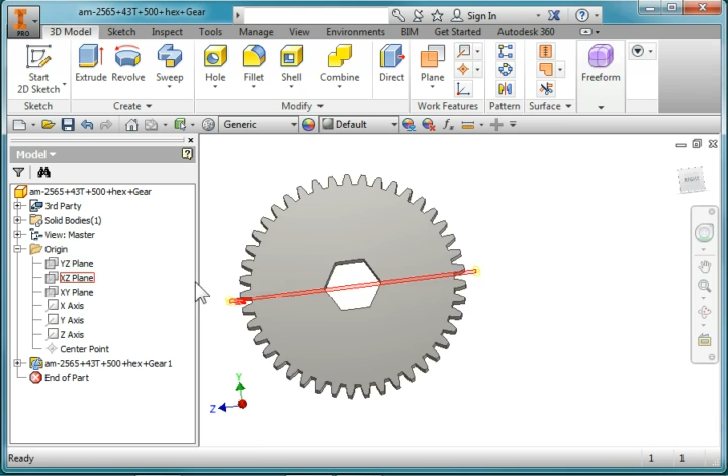So I'm going to add an axis to the part. Notice that here there's a folder of the axis that I'm going to create actually already exists, but you really can't turn them on and off. They're there as references, so I'm going to create a new x-axis that goes through the center of the part, and to do that I'm going to come up here to Axis and create a new axis through

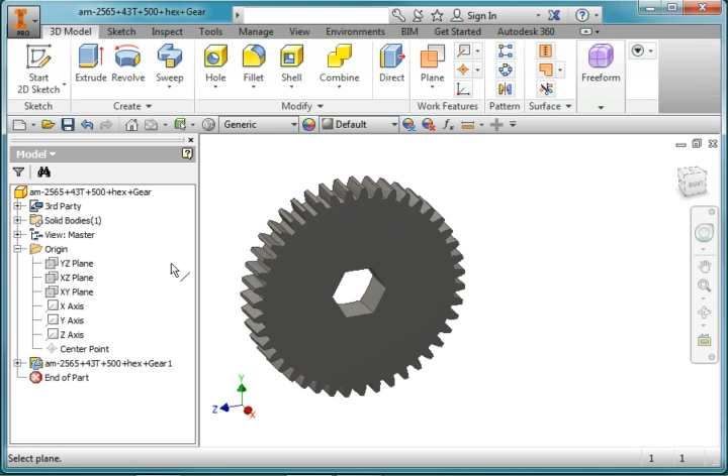intersection of two planes. So now it's asking me to select the planes, and I'm going to select this XZ plane and the XY plane. And now if you notice, there's my axis, and it's down here, work axis 1. I'm going to rename it, call it axis rotation.

I'm going to create a new plane for alignment. When I align this to a hex shaft, I'm going to need a work plane to align. So if there's a plane on the hex shaft and a plane on the gear, I could just align those two planes. It makes it a lot easier. So that plane actually already exists, but it's here. It's under the origin, and I want it out here outside of that folder.

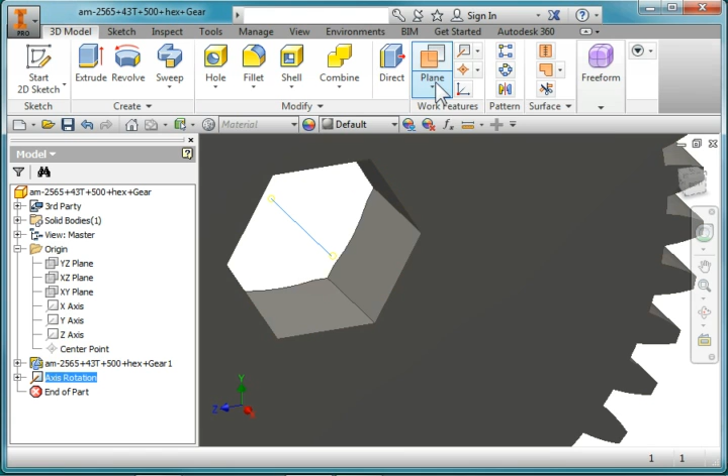So I'm going to create a new work plane, offset from plane, and you notice that this plane goes through the two vertices of the hex, and so that's exactly how I want to use it as an alignment plane. So I'm going to click on there, and I'm going to have an offset of 0, hit enter, and now here's my new work plane, and I'm going to click here just before the name of the plane, just before the W, and that'll let me rename it. I'm going to call it plane hex.

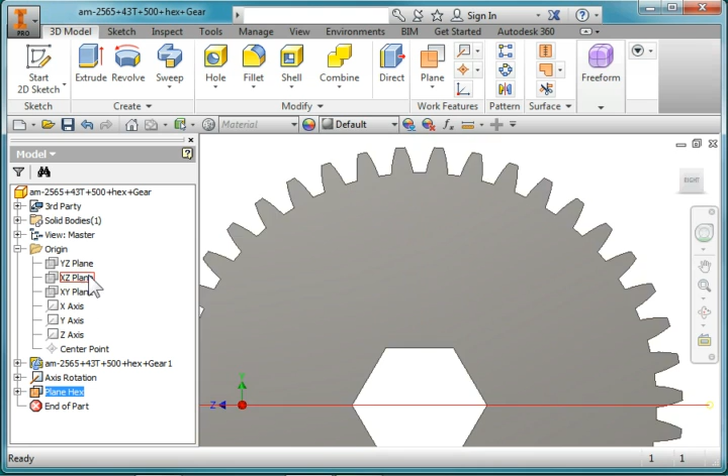I'm going to create two more work planes, one that goes through the center of the tooth and one that goes through the trough. And most likely one of those already exists because of how they designed it, and it in fact is this one right here, the XY plane goes right through the center of the trough of the key. And so I'm going to duplicate that.

So do the same thing, offset from plane, and I'm going to choose the... so let me try that again. I'm going to do offset from plane, and I'm going to choose this plane here, the XY plane, and set an offset of 0, and there's my new work plane. And I'm going to call it plane trough.

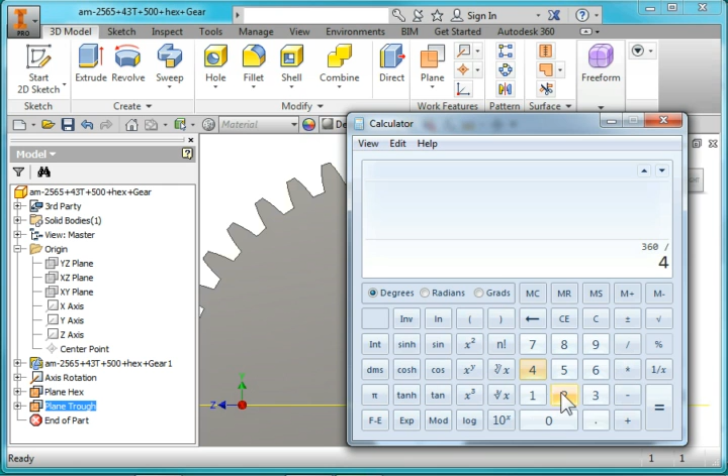So I'm going to create a new one that goes right through the center of the tooth, and to do that, I'm going to pull up my calculator. And this has 42 teeth, so I'm going to divide 360 by 42. But I'm not going over an entire pitch. I'm not going from here to here. I want to go over half a pitch, so I'm going to divide this by 2. And that's 4.2857.

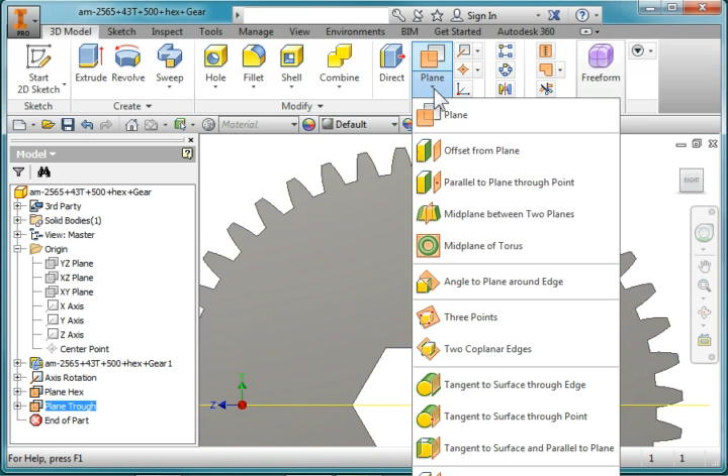So I'm going to create a new work plane at an angle around an edge. And that edge I'm going to use is this axis of rotation that I created earlier. So it's asking me for a plane. I'm going to choose this plane, and it's asking me for an edge. I'm going to choose this axis.

And now it's asking me for a measurement in radians. I'm going to type in the degrees. You have to specify degrees, so I'm going to type in 4.2857 and a space DEG for degrees. And you notice there's my new work plane right there. So I'm going to rename that. I'm going to call it plane tooth.

But one thing that Inventor did is that it buried my other work plane here underneath because it thought I was using it just as a reference. But in fact, I'm going to bring it back up here so that they're both at the root level. So I have my axis of rotation, my hex plane for aligning the hex shaft, my plane that goes to the trough, and my plane that goes to my tooth.

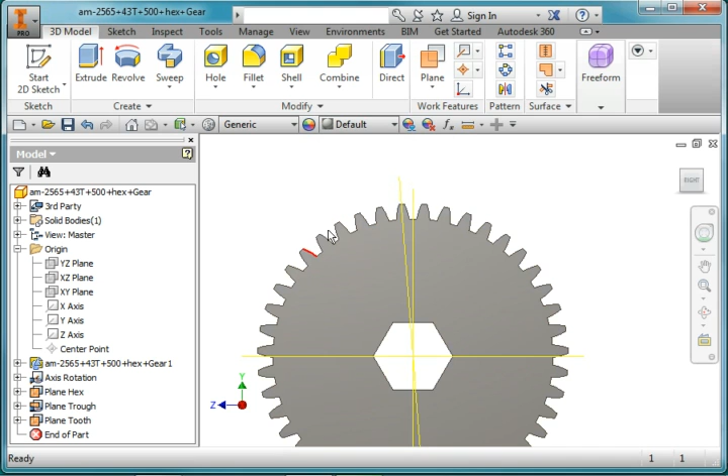Now I'm going to create a cylinder for aligning gear to gear. So I'm going to create a new sketch on that face, and I want to grab the center of that gear. I want to make sure I grab the center, and I'm going to go back to AndyMark, and you notice that under the description it tells you what the pitch diameter is. It's 2.15 inches.

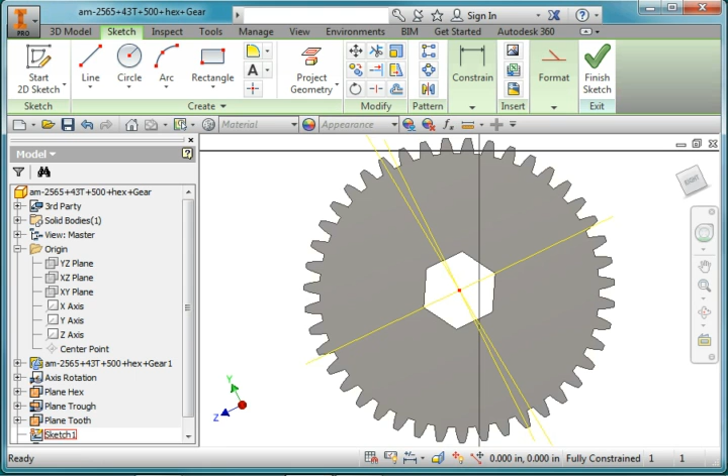So I'm going to create a circle at the origin, making sure that I grab that origin. It's very critical. And 2.15. And there's my circle. I'm going to hit the green check.

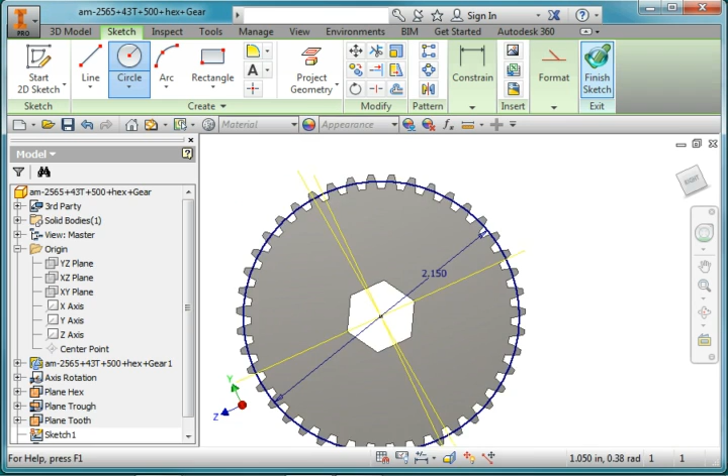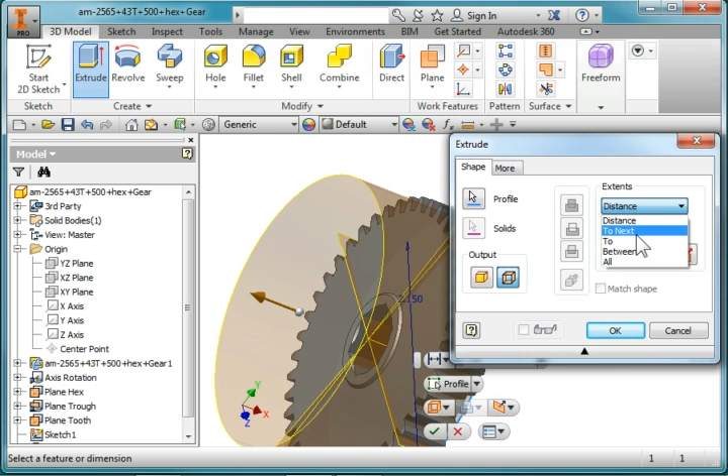I'm going to extrude, but I'm not going to extrude a solid into the body. I'm going to reverse the direction, but I want to create a surface feature, not a part. I don't want to superimpose a feature over a part. I'm going to go to this surface here, and there's my cylinder. I'm going to hit OK. And if you notice, it's created my surface feature. It's right here. And I'm going to call it pitch diameter.

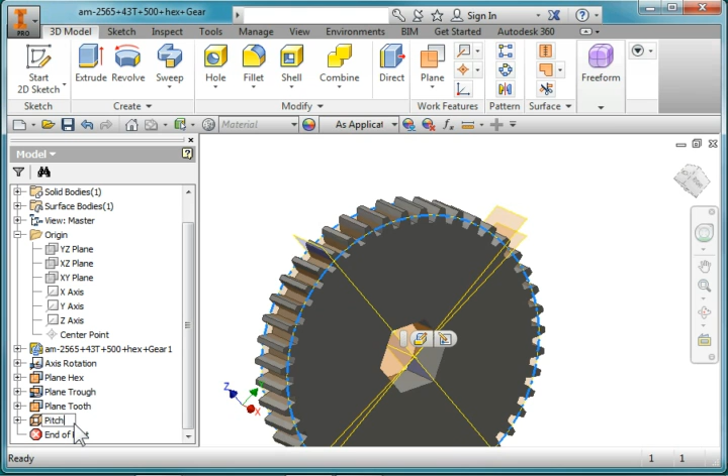And so there's my part, my fully documented part. I'm going to go ahead and save it. I'm going to save as, because I want to make sure where I'm saving it. And you notice what it wants to do. It wants to store it in the downloads directory, in the imported components folder, and I want to store it in Fembots 2016. So I'm going to store it here. I'm going to hit save.

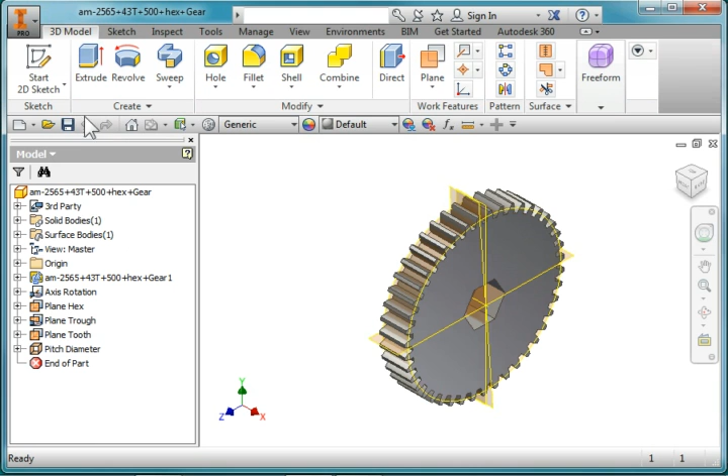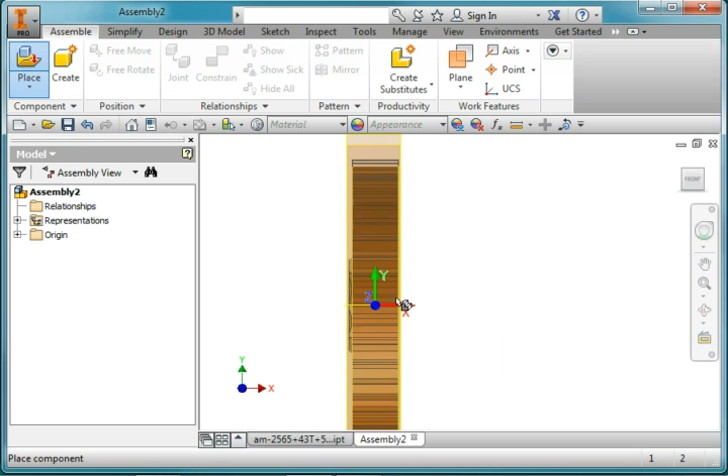I'm going to create a new assembly, and I'm going to place that part. Place the component. This gear. Well, here again it's Fembots 2016. That gear there. I'm going to place it. I'm going to place two of them and hit OK. So I'm going to go back to the first one, and I'm going to ground that part so that it can't move.

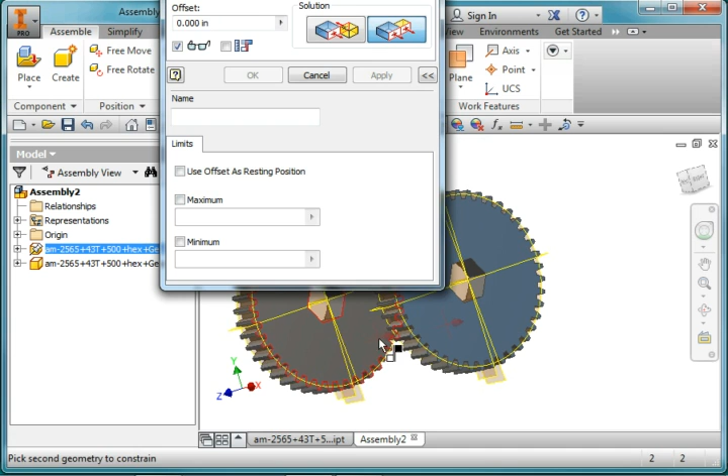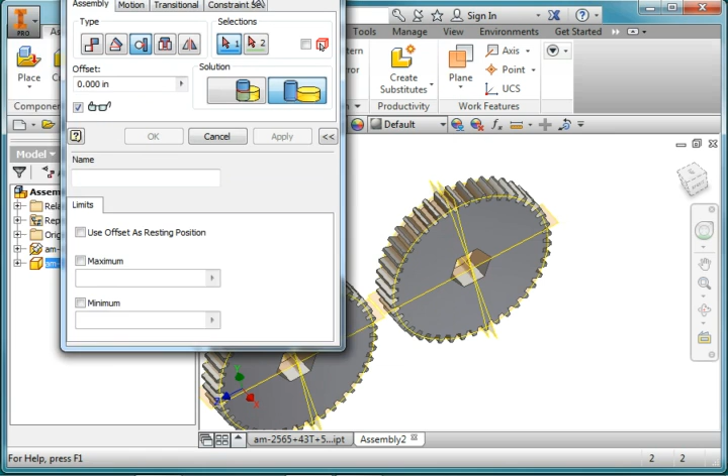And now I'm going to add a constraint. I'm going to use a flush constraint, and I'm going to make that surface flush with that. Hit apply. Now I'm going to add another constraint. I'm going to use the tangent constraint this time. And I'm going to align those two features that I created. I'm going to make that tangent to that. Hit apply.

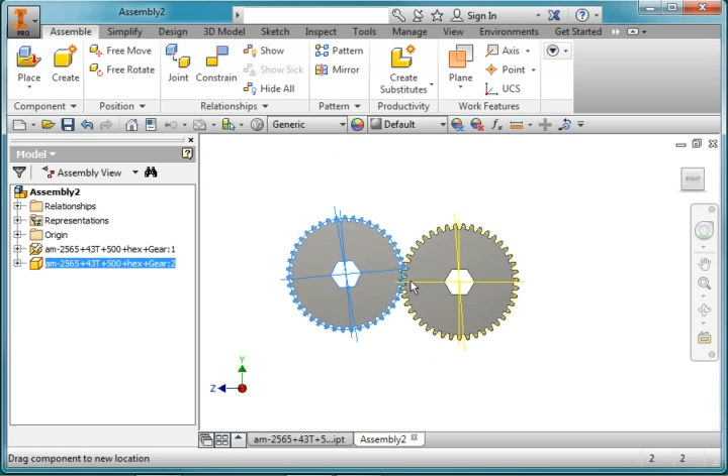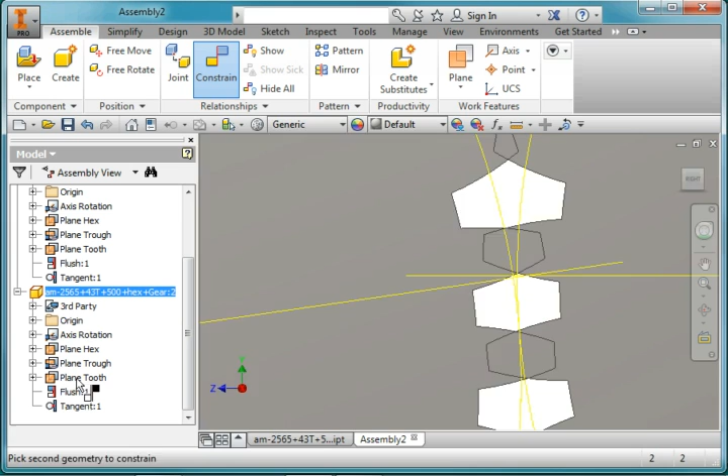And you now notice that this remains tangent to that. But if you notice, the teeth aren't aligned. So I'm going to go back and open up my 2 gears, and I'm going to temporarily create a constraint to align the gears. So I'm going to use an alignment, and I'm going to align the trough plane in one gear to the tooth plane on the other, and hit apply.

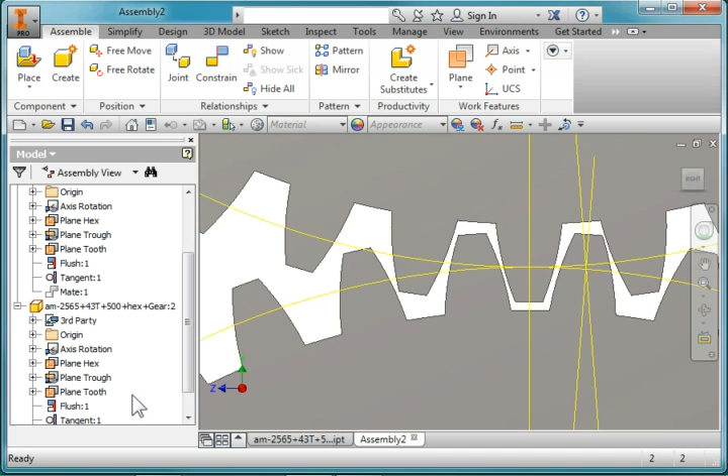Now if you notice, the 2 gears are aligned now perfectly, but they can't move because I've fully constrained it. So I created that just as a temporary measure. I'm going to go ahead and suppress that. Okay, and now I'm going to create a new constraint, and that constraint is going to be a motion constraint. And the gears are going to rotate in opposite directions.

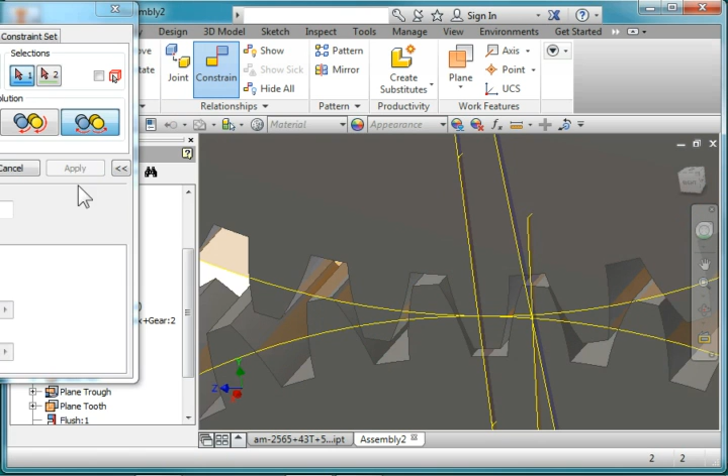I'm going to rotate around, and I'm going to specify that face and the other adjoining face, that face there, and hit apply, cancel. And now you notice that when I move one of the gears, it rotates around the fixed part, and they're aligned. Of course, if I had this grounded to a shaft... so this is just for simulation.

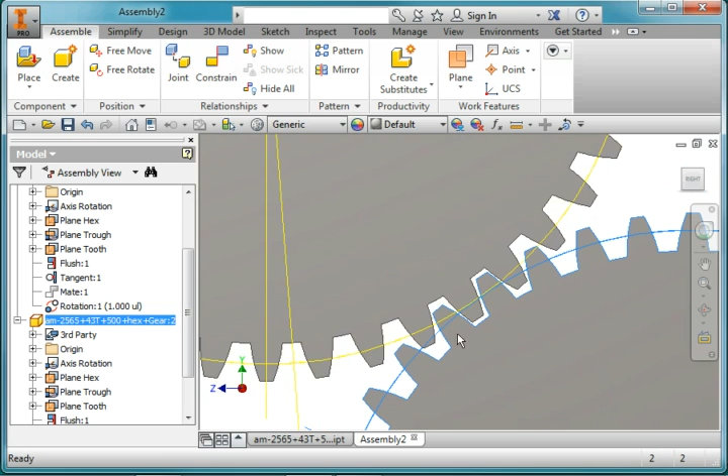I'm going to show you another way of doing this. This is really just for animation to see if your gears are aligned, but I'm going to show you a different way of doing it so you could simulate the gears moving. But for right now, this is the first step, just so you could show that your gears are, in fact, aligned.

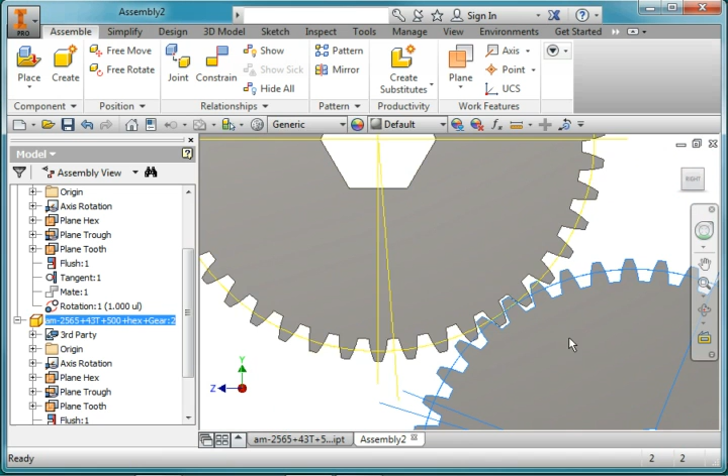And if you had this attached to a shaft, and you rotated the shaft and this rotated, it would turn this. But right now, the way I have it situated, they're just going around one another because I don't have the shafts in place or the bearings or the motor. So that's how you simulate the gear motion.